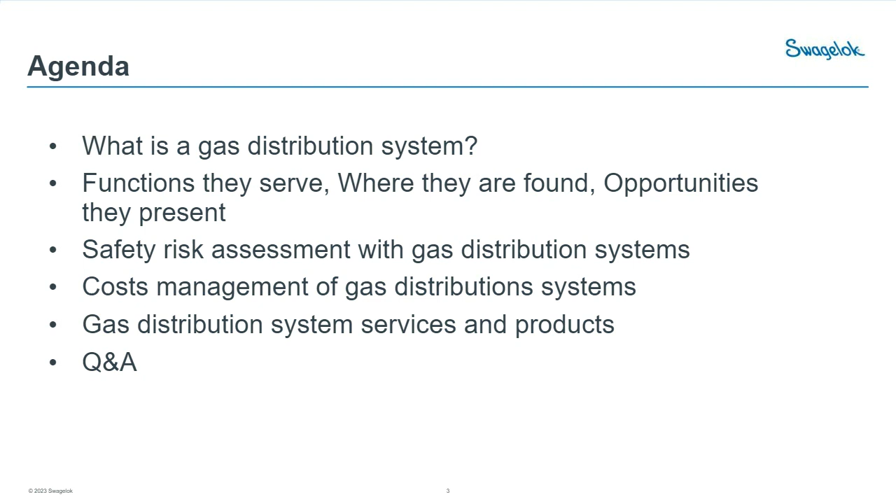Today, we're going to break a little bit into the DNA of these gas distribution systems. We're going to talk a little bit about background, but then really get into a high-level risk assessment, where our goal will be to understand some of the best practice mitigations. From there, we'll dig into the cost management of these systems, really with the intent of looking at the total life cycle. And then, time permitting, we will get into some of the Q&A.

A gas distribution system is defined as a network of tubes, pipes, and a lot of other components that are used to transport a gas, typically from a high variable pressure source to a designated controlled point of use.

In this example, we have a laboratory where the point of use is within, sorry, I have an overhead announcement going on.

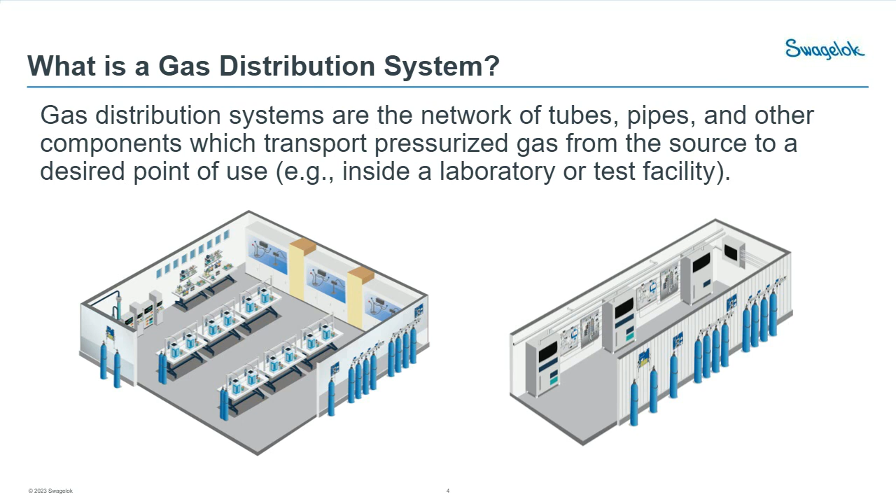The point of use may be our laboratory equipment, and then the source gases come from the outside. So in this case, they're stored within the bottles on the outside of the environment. A gas distribution system can serve a variety of functions, but at minimum, it needs to ensure that personnel can access the gas bottles so that they can be adequately replaced.

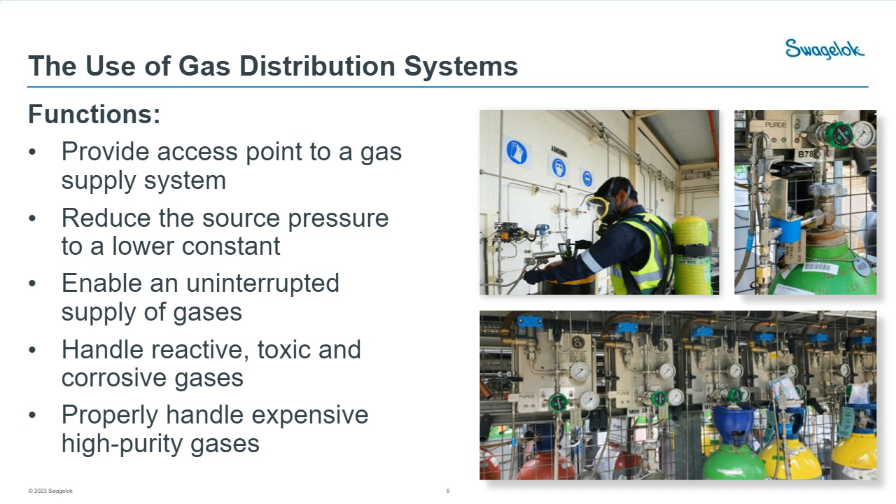At its core, a gas system is really intended to help deliver a high variable pressure to a low constant point of use, as we've mentioned, in a very uninterrupted manner. And the neat thing is that these gas systems are capable of handling reactive, toxic, and corrosive gases, as well as judiciously handling your high value, high purity gases.

Gas distribution systems can be found in a variety of applications and in a variety of industries. But one thing that we see that's kind of unanimous across all of these is that there's always opportunity where these systems are overlooked and misunderstood.

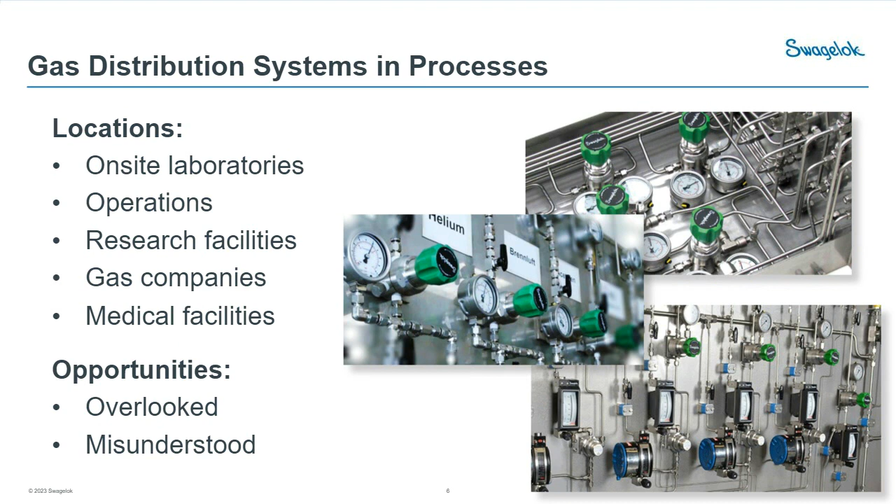What we see among our customers is largely that those who overlook these systems on a regular basis fall into one of four paradigms. Sometimes ownership is not routine, meaning you may have a facilities or an MRO team that handles your pedestrian gases, compressed air or nitrogen, low cost stuff. But then you have specialty gases that are owned by, say, a laboratory manager. And where the ownership is maybe not routine or not typical, sometimes these systems fall through the cracks.

In other cases, we have a utility that may span multiple jurisdictions and ownership is not clear. In other circumstances, we see that these systems are simply deprioritized. In some cases, it's because there's higher priority activities. In other cases, it's treated as more of a foundational utility, like it's just taken for granted. And that fits in with the last paradigm, which is kind of that set it and forget it, where it's often overlooked that gas distribution systems need some TLC and need some regular maintenance and oversight.

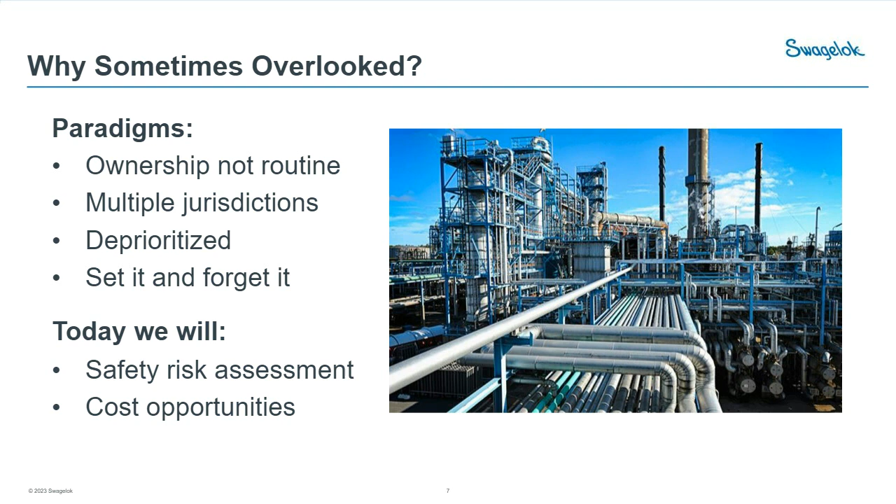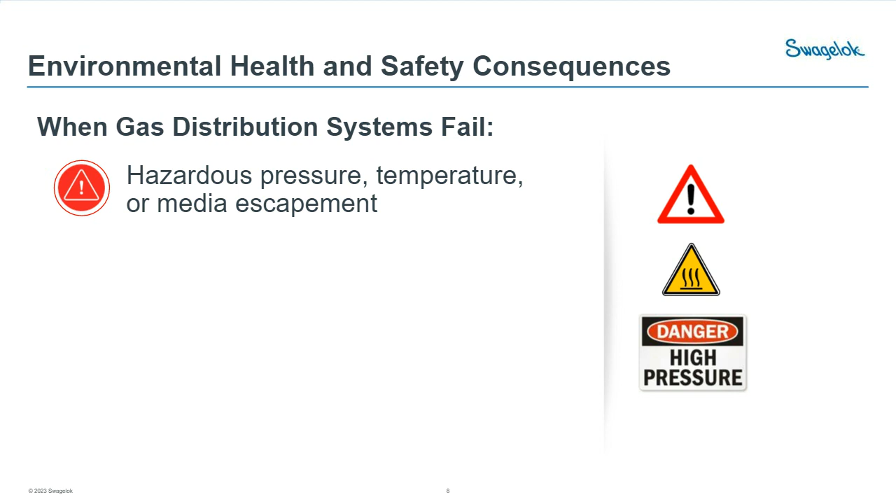So today we're going to dig into both the safety risk assessment as well as an opportunity on cost and cost management for these. As we jump into our risk assessment, it's important to first look at some of the potential adverse consequences to both personnel and environment around gas distribution systems. When they fail, at its core, the risk is that a hazardous pressure, temperature, or media escapes and causes adverse impact for your personnel or environment.

Another potential consequence, or really a cause, is that with pressure reducing devices like regulators, it's possible that they fail, resulting in an overpressurization either upstream or downstream of that regulator, contingent upon regulator type, where the equipment, either upstream or downstream, may or may not be capable of handling that pressure, temperature, or media.

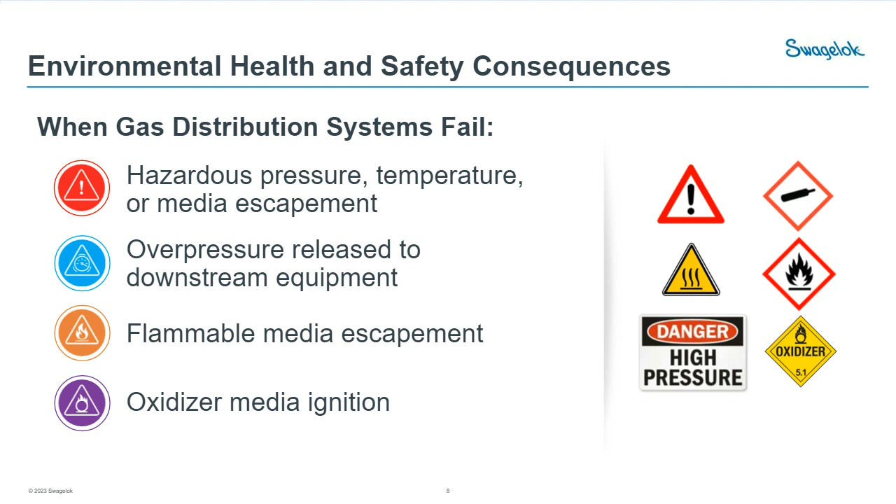It's also possible that we may be carrying a specific type of hazardous media, like a flammable media, where when that escapes, it can cause other risks for people and environment. Or it may be possible that we're carrying an oxidizer, where that media, independent of escapement, could ignite given the right conditions. So all of those things can be bad for people and environment.

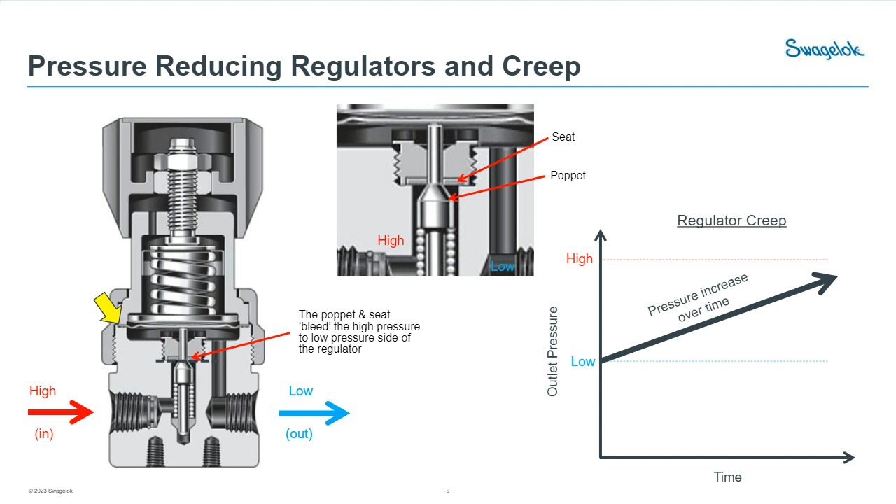So the look of this slide and the next few slides are going to be very similar. We're going to be talking a little bit about risks, and we're going to start with opportunities for design in the way of these gas distribution systems. So with all risks, we start with an oversight. The oversight allows for certain failure modes to occur. As a consequence of those failure modes, there are undesirable consequences. The same consequences that we talked about earlier.

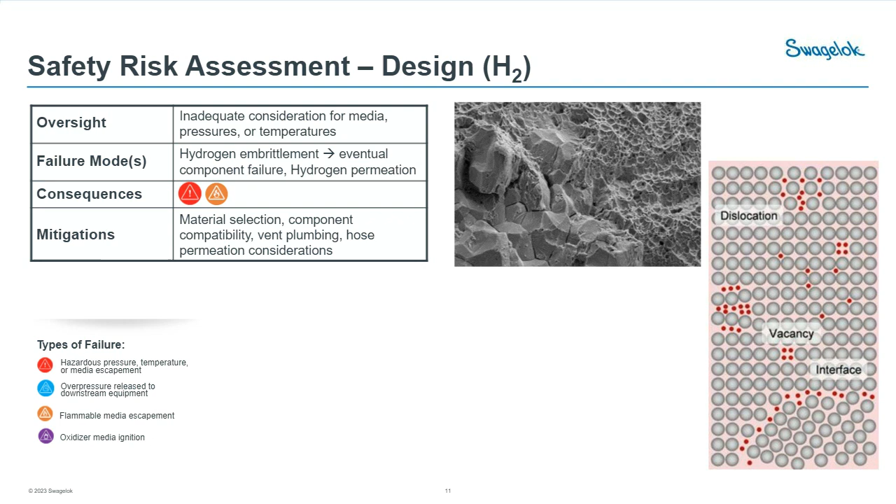Another risk or failure mode behind hydrogen is inadequate consideration for permeation. Permeability is the measure of how easy it is for a small molecule gas to leak through some sort of membrane. And in the case of a gas distribution system, we have to pay special attention to the organic materials that we choose. I think of things like hose cores, O-rings, or valve seats as some of those things that we need to pay special attention to, to ensure that we don't have excess permeation.

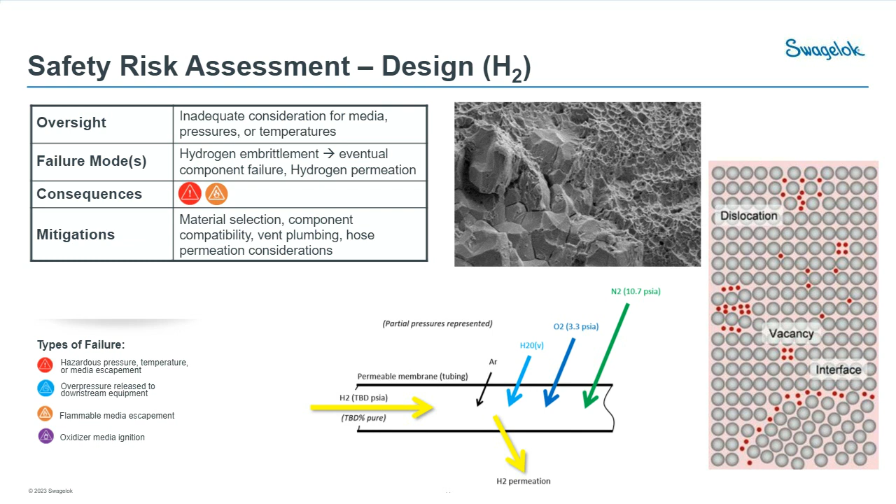Another inadequate consideration for media involves consideration for oxidizer medias when it comes to gas distribution systems. So in this case, we'll talk a little bit about oxygen. Oxygen is a problem because it can ignite given the presence of both a heat and a fuel source. And that can happen at very low concentrations. Admittedly, 16% or greater oxygen concentration percent by volume is enough to cause ignition. The air we breathe is greater than 16% concentration of oxygen.

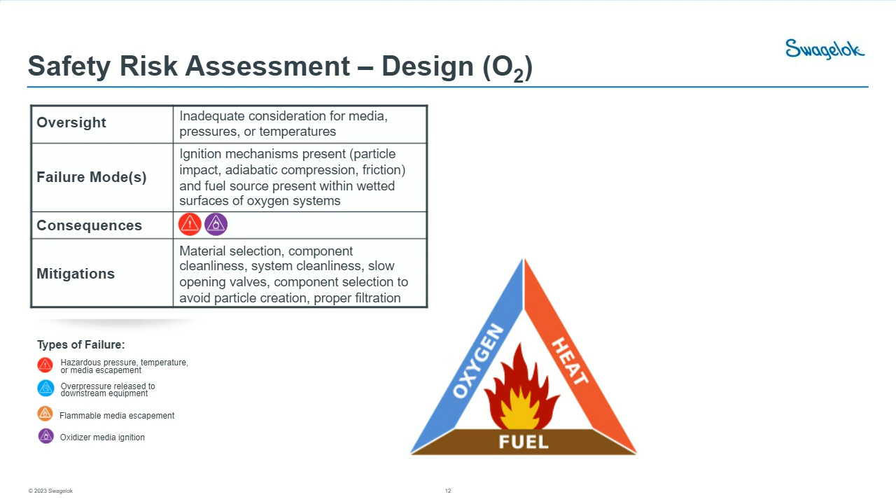There are other oxidizers too that we won't hit on, but are still equally at risk: fluorine, nitrous oxide, ozone, to name a few. The primary failure mode of an oxygen system is that we allow for the presence of that heat and fuel source to complete the triangle. So at its core, the mitigations involve adequate material selection so that we can minimize the fuel source.

Another source of fuel could be the contamination that is present on the gas distribution system when it's constructed. That contamination can be mitigated by using ASTM G93 certified components. ASTM G93 is just an industry standard around oxygen service, and it ensures adequate hydrocarbon and particulate cleanliness as to mitigate that fuel source risk.

Now, heat sources can come in a few manners. It can come from the friction within our gas distribution systems, but it can also come from things like adiabatic compression, which is what happens when we see a rapid increase in pressure. We also see an immediate increase in temperature, and that can be enough to cause ignition.

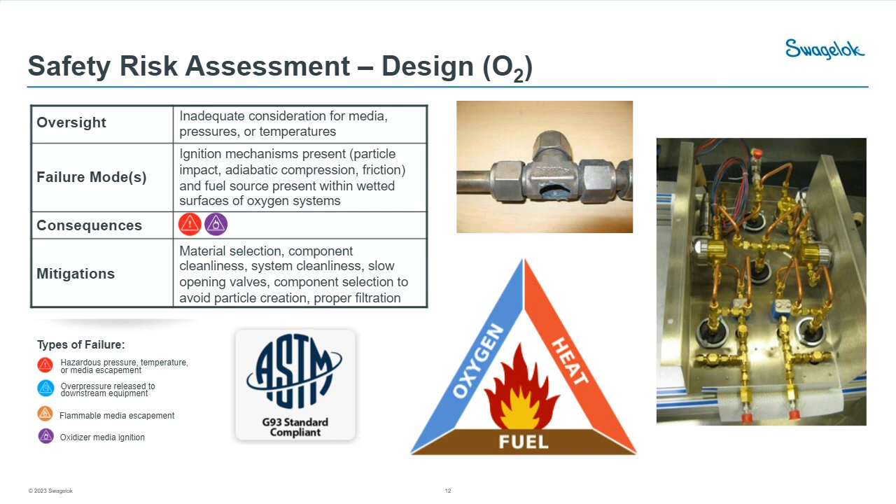So we can deploy nice little tricks like making sure that we don't create particles in our gas system. So that comes down to, again, material and component selection, as well as leveraging proper filtration to catch some of that stuff before it does bad things.

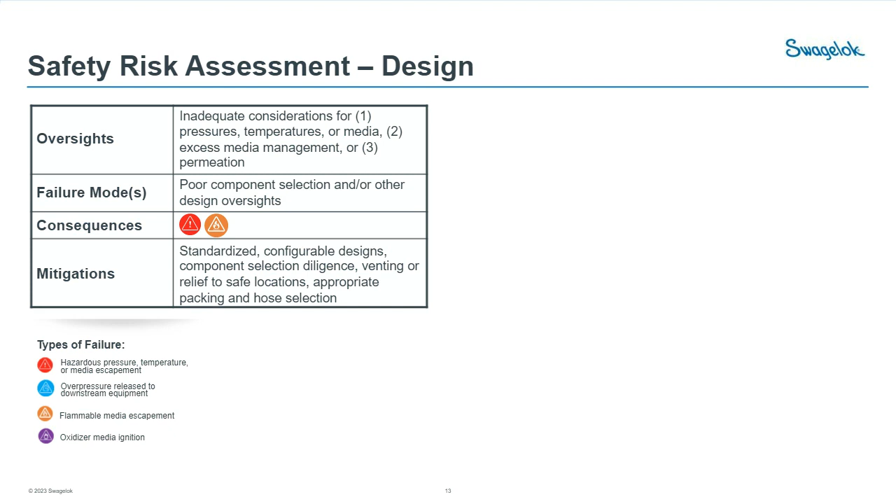There's a couple other generic design oversights that I'll speak to quickly around gas distribution systems. Probably the most prevalent oversight we see is really an inadequate component selection.

Let's face it, there's a lot of parts out there. Anybody who looks at a product catalog, it's usually overwhelming. And it's really easy to lose sight of what's important given the fact that we have materials and flows and pressures and temperatures and media compatibility, all that stuff. So in order to mitigate that risk and the subsequent failures that come along with it, we highly recommend reaching out to the right resources, internal resources, external resources.

There's a lot of great knowledge out there that is at our fingertips. Also leaning on standardized designs, whether it's designs that are proven within your organization and or for your applications, or leaning on pre-engineered, pre-standardized systems. Those are very effective for handling and helping to mitigate risks around some of the unique medias and pressures and temperatures that we see.

Another oversight that's very common is inadequate consideration for where our vent or our relief valves vent to. And this is important. That goes back to the earlier schematic. If we have a hazardous media, a flammable media, or an oxidizer, chances are likely we don't want to see it dispelled into the general environment where our people could be potentially at risk. So whether we're venting to a safe roof line or to a containment area or even to flare, that's really paramount, and that's something that we see more often than not.

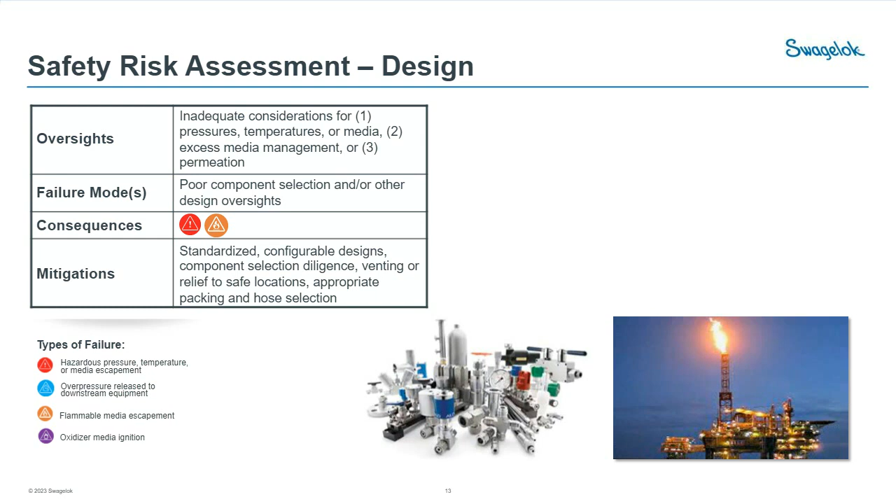Lastly, permeation, not just for hydrogen in our earlier example, but permeation of a hazardous media can be risky. So adequate consideration for some of the organic materials that are at risk for permeation is paramount.

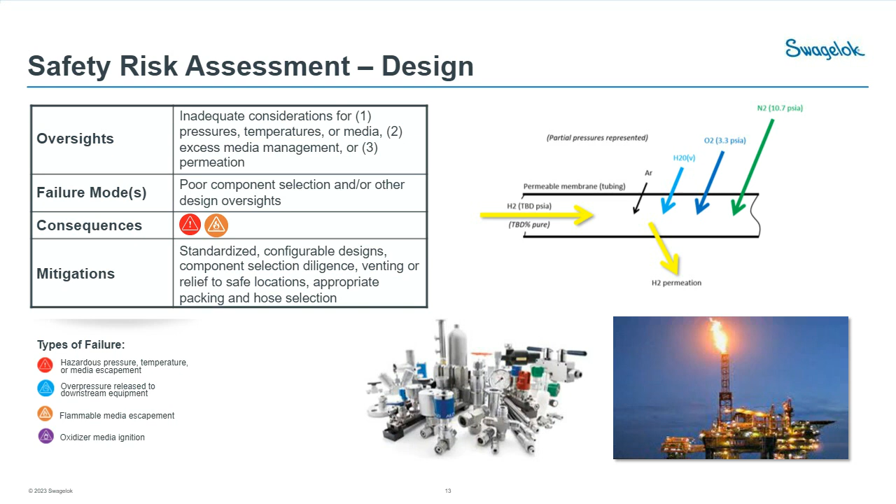Beyond design, there are risks that we inherit or can be exposed to during the assembly, test, and installation of our gas distribution systems. At its core, these failures happen when we don't adequately pull down the components, assembly of the components is inadequate, and we fail to appropriately and safely test prior to full pressurization. And this can have a sequence of undesired consequences.

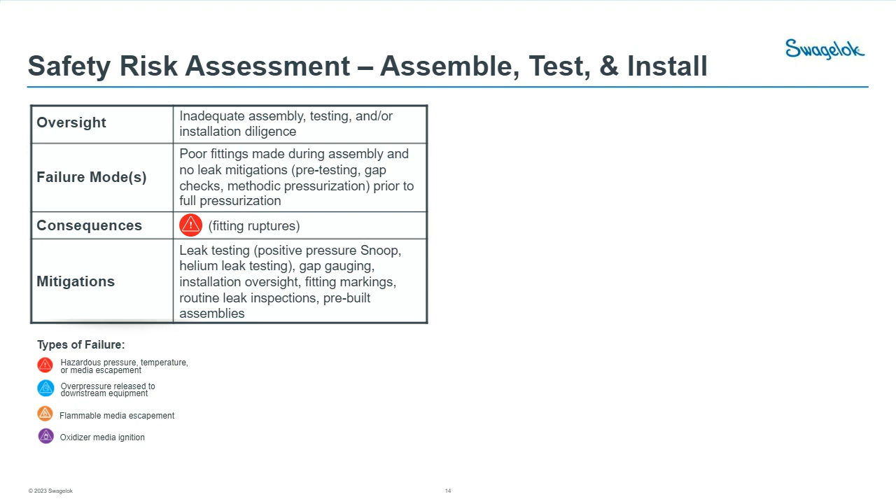I've seen fittings not properly pulled down with full pressurization. I've seen tubes bend over backwards and fire ferrules and nuts into locations where they're never found again. And lucky for me, I've never seen someone actually get hurt, but it's very possible. So we have certain tools, mitigations that we can deploy to help catch and prevent these things from happening. We can rely on basic leak inspection.

So whether it's a soap and water combination, or if we've got a nice little pre-assembled unit that we can stick onto a helium leak tester if we have concerns for some of that smaller media that's of high value. We can do mechanical fitment checks to make sure that we've adequately pulled down the fittings through gap gauging.

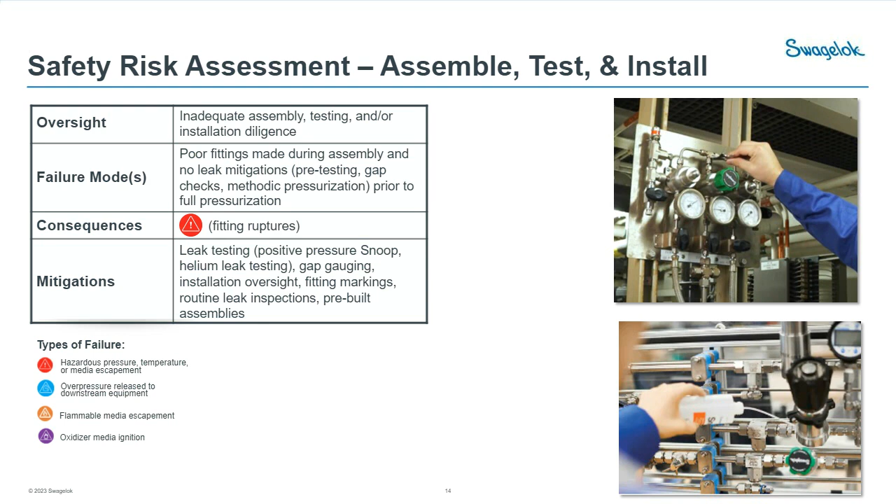I've seen a lot of organizations deploy checklists, or this is one of my favorites. I've seen pipe fitters and plumbers initial some of the fittings that they've done in Sharpie so that they know that they've pulled it down and that they've done the gap gauging. It's kind of a nice check and easy to audit.

Also, leaning on pre-assembled panels or pre-assembled systems is very useful. Let's face it, a system that's built in a contained environment that's free from distractions, like the distractions of otherwise building it in situ on the shop floor where it's noisy, greasy, loud, you're much less likely to observe those human errors that might otherwise result in some of these risks that we speak to.

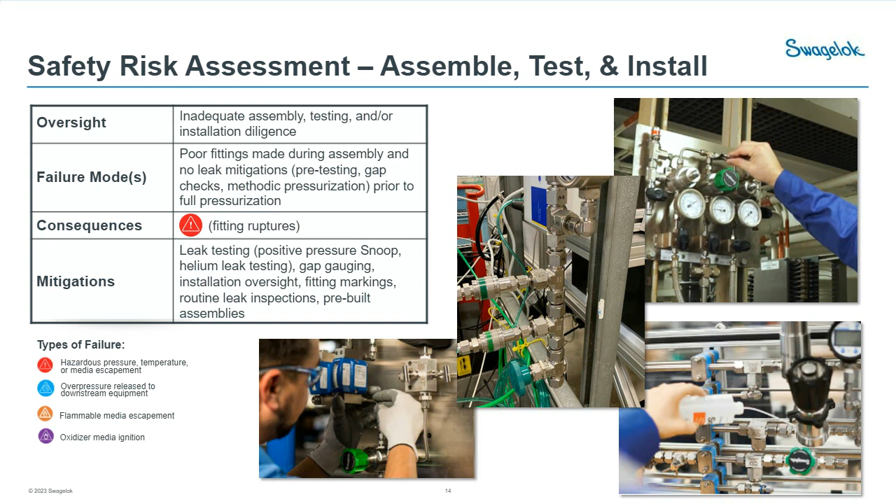The last opportunity certainly lies in the way of leveraging installation oversight. So whether you have a buddy system where you have someone pulling down a fitting, or you have a tradesman pulling down a fitting and then someone goes through and audits it, or there are organizations that will offer you that same sort of oversight should you so choose to deploy it.

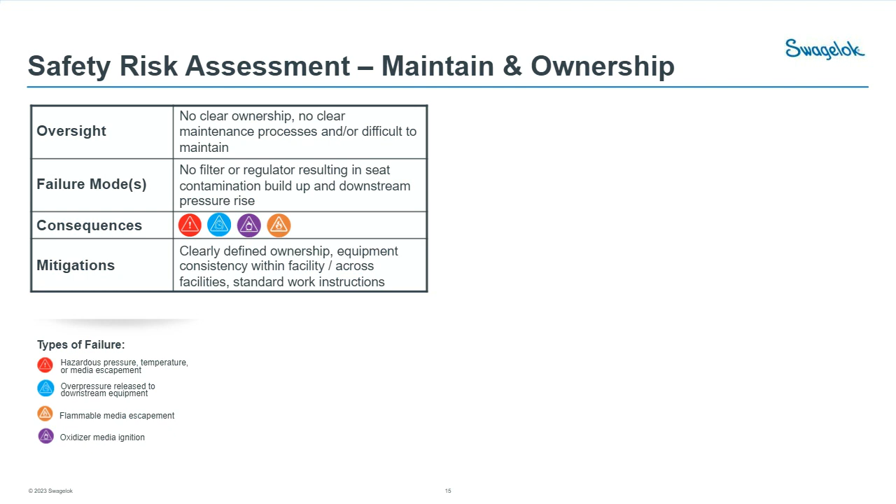One of the most common organizational shortcomings that we see with gas distribution systems, as we've kind of talked about, is the lack of ownership and sustained oversight of these systems. One of my favorite sayings about gas distribution systems is that these are often the types of systems that, like loose change, fall between the couch cushions. And when it comes to the change that's at risk here, it's not just from a safety standpoint, but it is about cost, which we'll get to here in a moment.

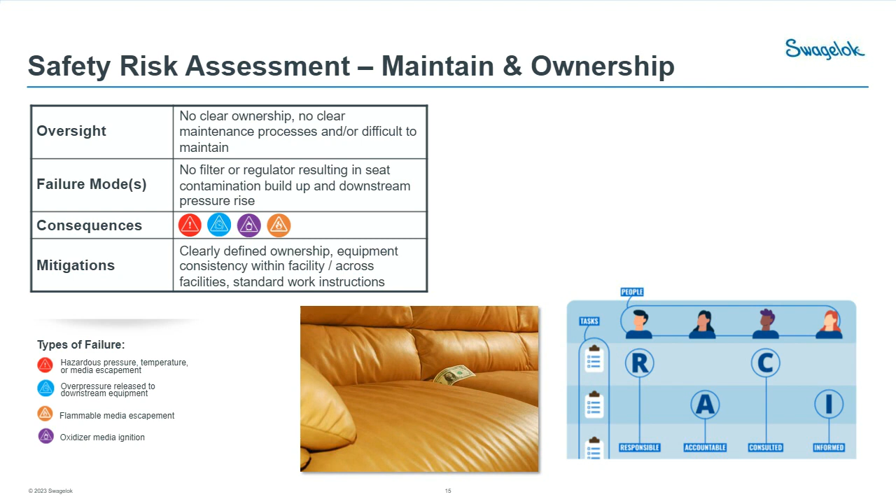So in order to mitigate those risks and some of the undesired consequences, which, let's face it, there's quite a few, we definitely recommend that organizations have clearly defined ownership for these gas systems. Typically, this is cross-functional ownership, where the accountable parties, the people that everyone answers to, are conventionally resources like a plant manager or an MRO manager or a facilities manager, a lab manager, someone with some sort of oversight that can watch the breadth of the responsible parties.

From a best practices perspective, having standardized work instructions for maintaining this equipment is paramount. Some gold standard organizations leverage their MRO systems for automated maintenance minders, ensuring preventative maintenance follows the desired cadence. And what unanimously works is relying on regular audits for these gas distribution systems to ensure good safety and stewardship of resources.

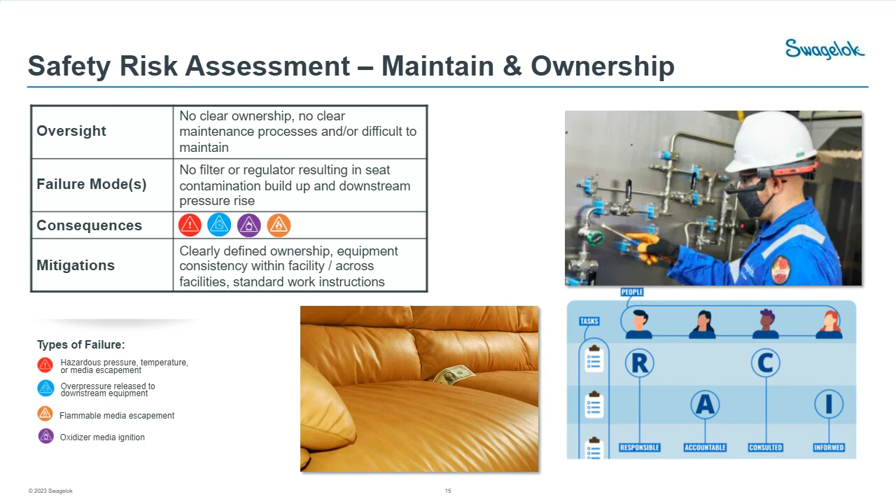Speaking of fiduciary use of resources, we now jump to controlling costs. If you talk to anyone in your finance team, you'd find that opportunities for controlling costs typically fall into three categories: cost savings, cost avoidances, and revenue preservation.

Cost savings are things that honestly go right back into the profit for an organization. They're costs that have historically always been in our rearview mirror, and if we can stop paying them today and tomorrow, then it goes right back into our profits.

It's no different with cost avoidances, however, which are things we maybe don't typically see, but should we have a failure of a gas distribution system, there's definitely going to be a need for some cash or capital outlay to help remediate that failure.

Last but not least, revenue preservation is equally important and often bucketed into this cost controlling opportunity. Let's face it, if we're not pulling in revenue, we're probably not making a profit.

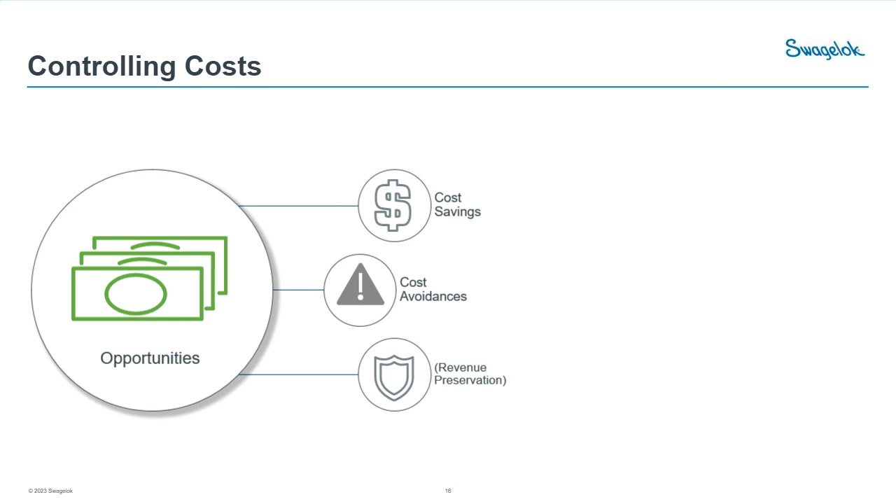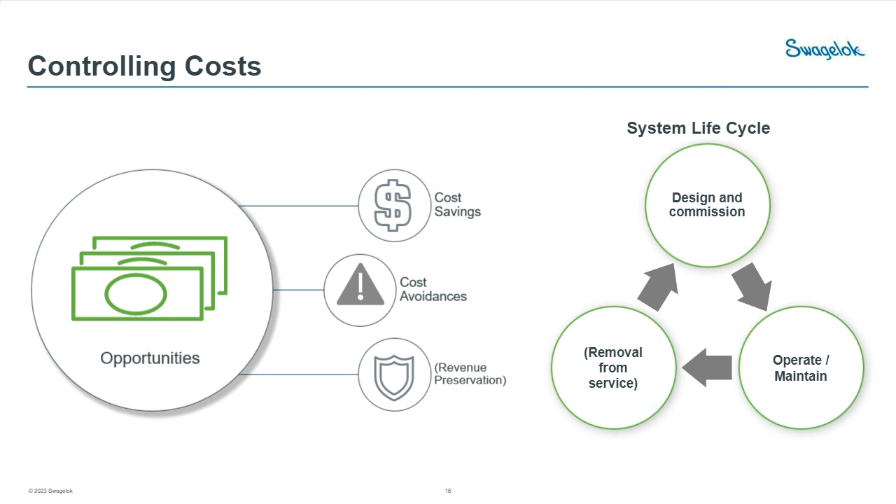Now, what we'll do over the next couple slides is talk a little bit about the system life cycle of these gas distribution systems and opportunities for controlling costs in both the design and commission, as well as the operate and maintain stages of the life cycle.

Since we started off with safety risk assessments, it only seems appropriate that we first start our conversations on safety. So what I'm going to do is share some statistics from the United States. My apologies to anybody joining us internationally. By sharing these stats, I'm not at all trying to take away from the emotional or physical toll that associates who deal with a workplace injury have to pay. But I do want to point out that there is a dollar value, a cost to organizations in the way of an avoidance by seeking to avoid these injuries.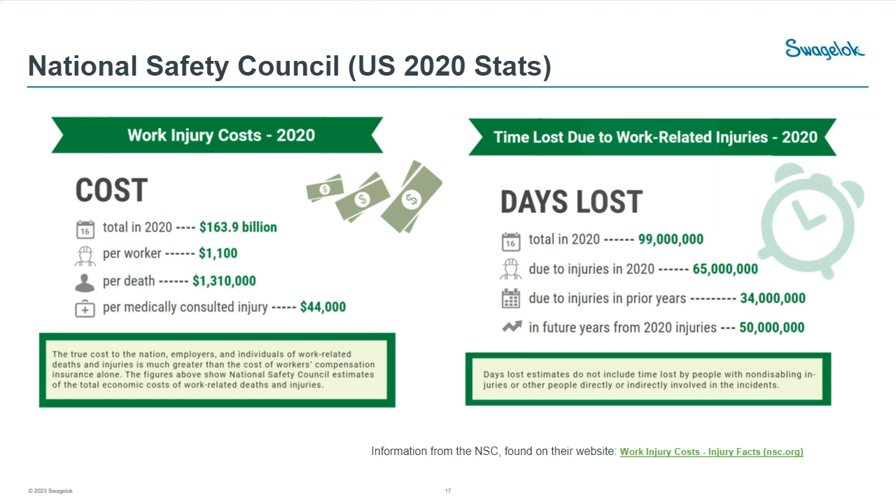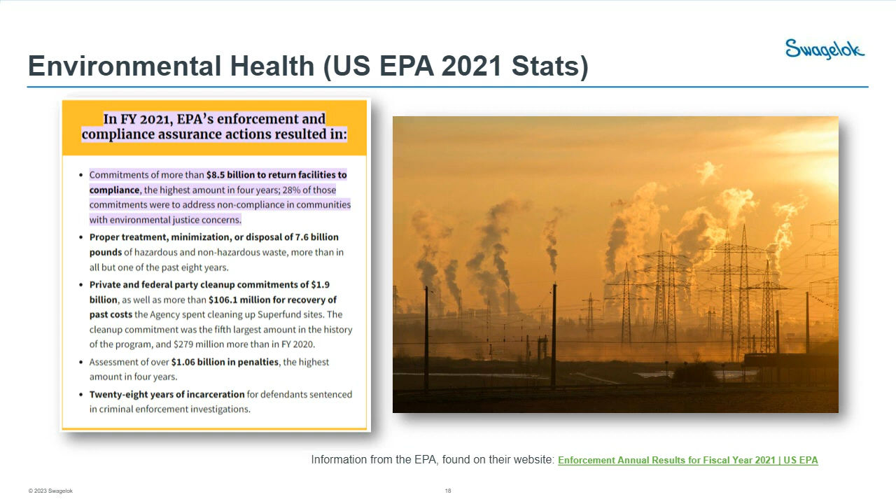A big opportunity in the way of cost avoidance when it comes to gas distribution systems involves the use of pre-designed, pre-engineered panels when building or replacing your system. These offer a lot more than just the convenience of avoiding and freeing up some of the labor and engineering resources to do it.

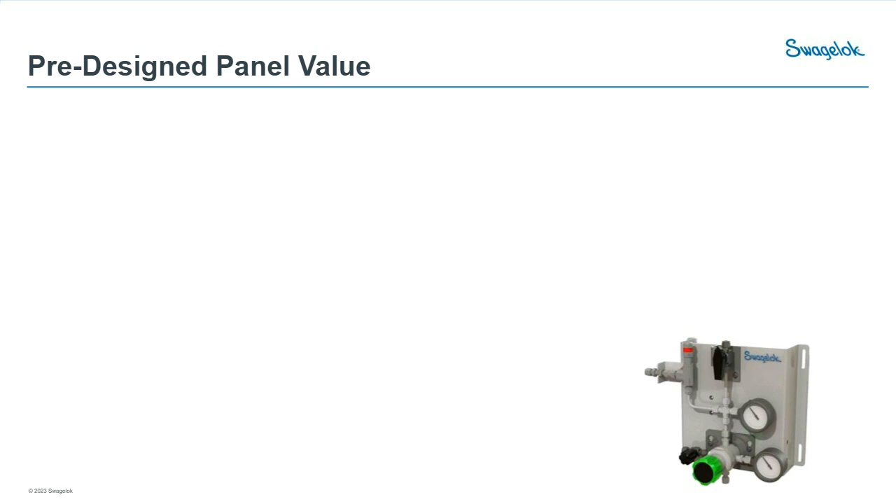Let's say, for example, we have a relatively pedestrian pressure reducing panel, like shown on the lower right here. This panel flows from bottom to top. It includes a regulator at the bottom, a couple gauges that straddle that regulator, a vent valve to the lower left, a relief valve to the upper left, and then an isolation valve at the exit, all built on a stainless panel.

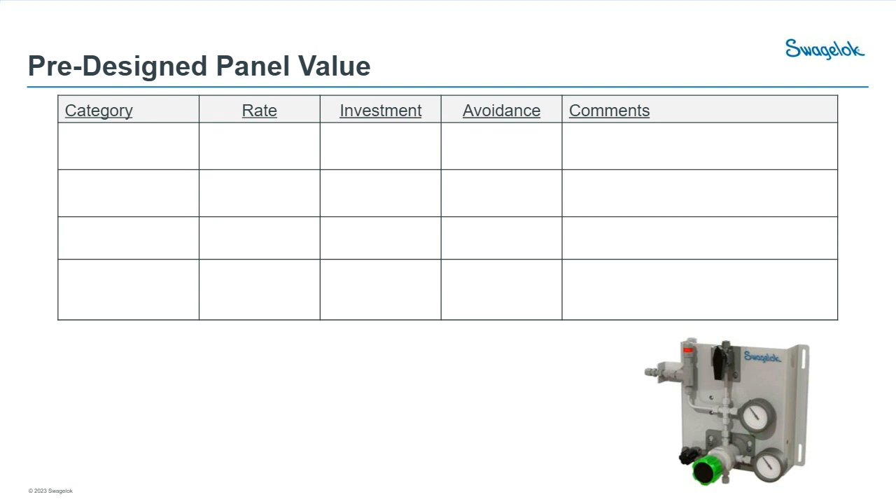Let's say hypothetically that we know the pressures, the temperatures, the medias, the flows, and all the necessary safety mitigations that we want to build into that, and we're ready to pick parts. Well, it turns out there's actually quite a bit of engineering value built into that pre-designed, pre-engineered panel.

There's also a lot of convenience in the way of labor avoidance when it comes to managing the inventory, should you alternatively seek to build it yourself. There's less packages to deal with, less content verification, storing, staging, and the like.

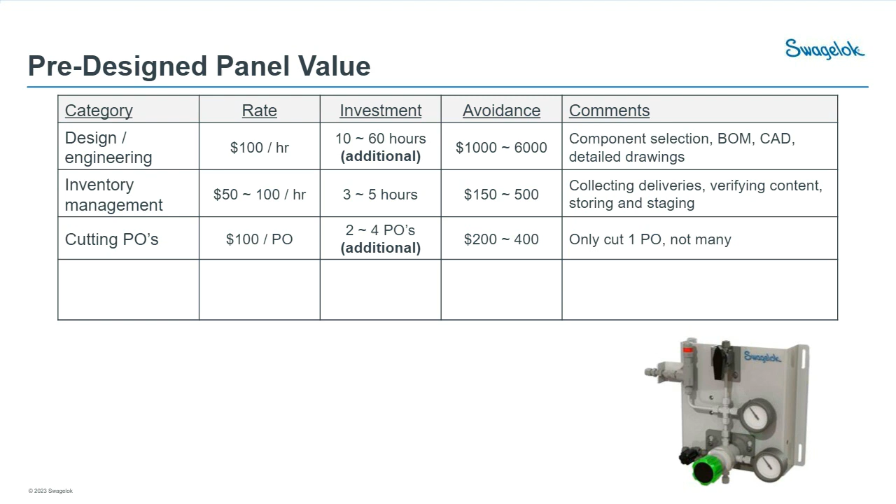There's also a convenience in the way of reduced PO cutting. Let's face it, a PO for most organizations is not cheap, especially if you've got an organization with multiple approvers. Those approvers are generally not cheap either, from an hourly rate. So cutting one PO versus cutting 3 to 5 is a huge advantage here.

Last but not least, whether you build the panel yourself or lean on an organization that typically builds these panels, their labor rates, your labor rates, tend to be much more cost effective than leaning on an outside tradesman, a pipe fitter, a plumber, whose hourly rates generally tend to be sometimes 1.5 to 3 times more expensive. There's quite a bit of cost avoidance there as well.

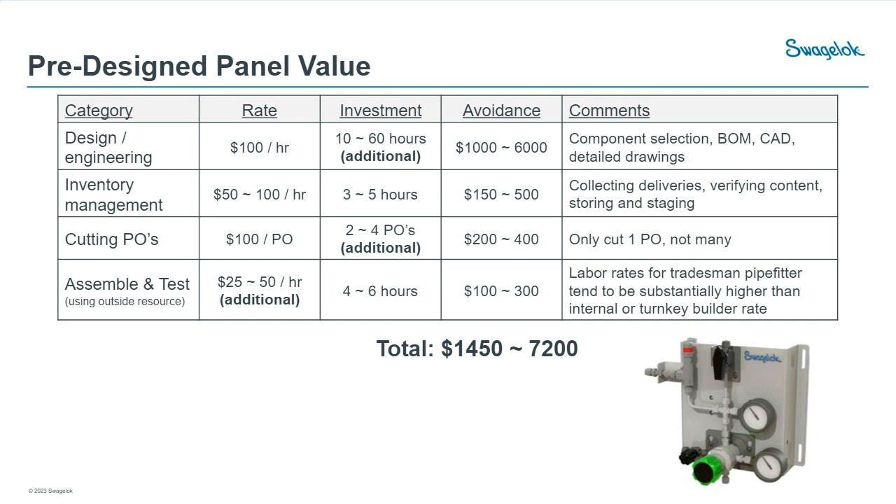In the aggregate, there's quite a bit of value built into these pre-engineered, pre-designed panels, and that can be a huge opportunity for organizations that look and seek to simplify and seek those cost avoidances. What's really amazing is that in this lower example, the overall price tag of that panel is dwarfed by the overall value built in. So it's a very useful lever when you know what to look for.

Jumping over to some cost saved opportunities, I'd like to speak to one in the maintenance arena. The specific opportunity is the idea of promoting your components to the front of a panel. So if there's a pre-assembled panel like shown on the left, bringing the components to the front offers some value in the way of maintenance labor over the alternative of burying those components behind in the back.

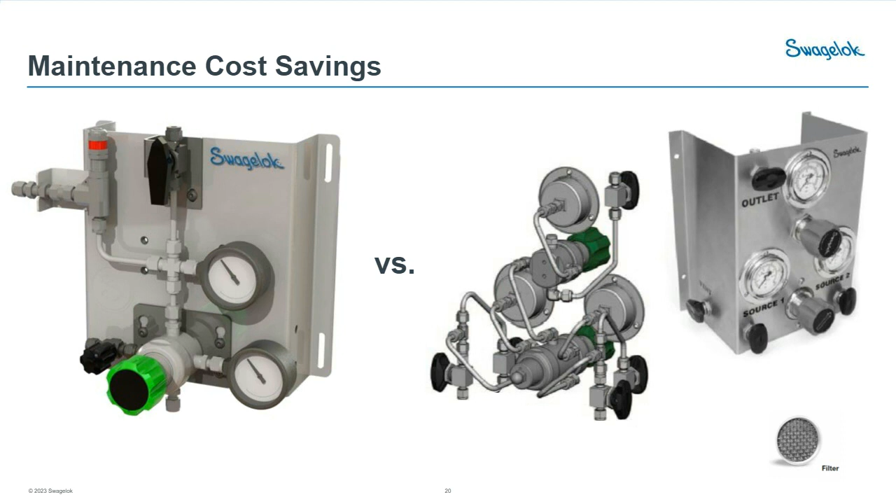Let's hypothetically say that we need to service the filter, shown on the lower right. That filter typically is installed at the inlet of our pressure reducing regulator - we have one regulator on the left, two on the right. Regardless, the access to that filter or that regulator is much more convenient when picking the option on the left compared to the right, to the tune of an estimated half an hour to two hours of savings in time by choosing the option on the left over the option on the right.

So let's say, for example, your maintenance rates are like between $50 to $100 an hour, and you've got multiple of these panels. Well, this can amount to thousands of dollars in savings per maintenance interval. And on top of all that, what's really great about the design on the left is that because the components are easy and visual to see, it's more intuitive how the panel should operate, assuming there's not clear instructions about how to use the equipment compared to the option on the right.

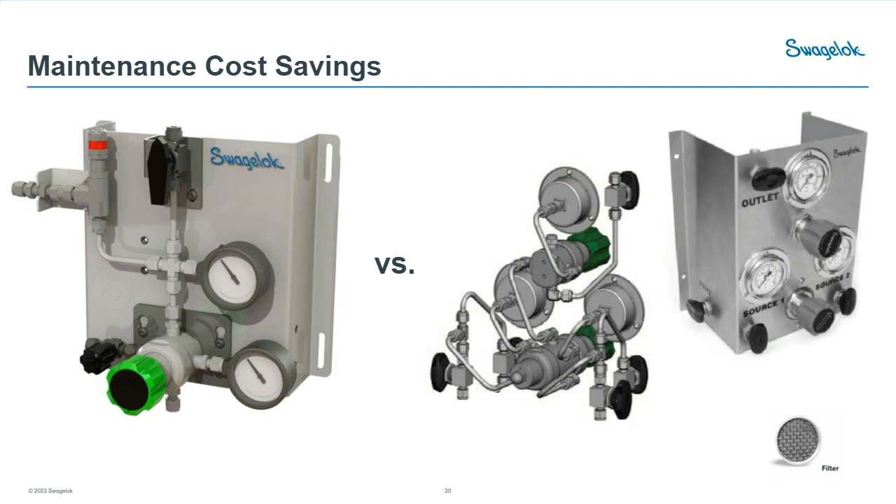Probably one of my favorite cost savings opportunities in the way of gas distribution systems is the leveraging of changeover panels for critical operations. The premise of any gas distribution system, but especially a changeover panel, is to get as much out of the bottle as we can while preserving a critical operation.

So the premise of a changeover panel is to have both a primary and a secondary source of a gas, such that as the primary is depleted, a secondary backup source can be deferred to upon depletion. In the case of the option on the left, as we deplete the primary, manual intervention is required by an operator or an associate to integrate those changes. And then once the secondary source is depleted, we can defer back to the replaced primary source.

Comparatively, the option on the right shows an automatic version of this changeover. As the name implies, it will automatically shift from primary to secondary, and then from secondary back to primary as the bottle sources are depleted.

What's really convenient about this is that systems of this nature can be configured with alarms and pressure switches. Pairing that with an andon light or a stack light, we can have some sort of automated alerts to let folks know that they need to make these changes.

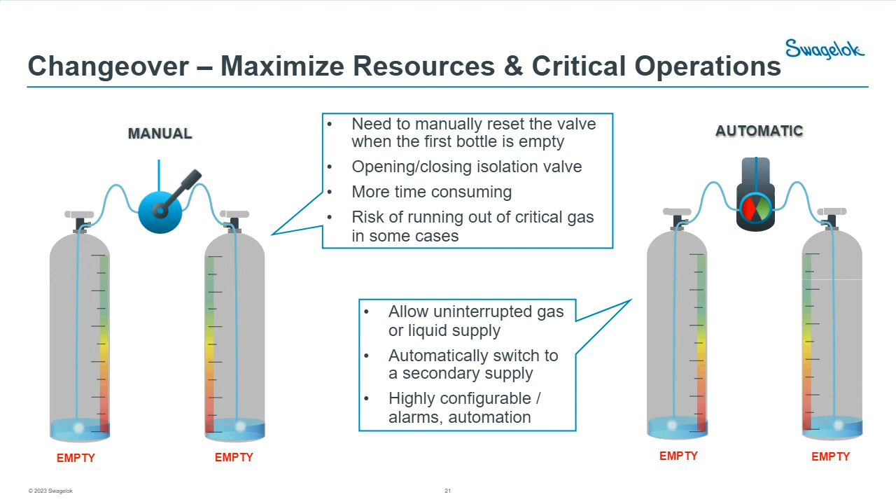Let's look at an example of where changeover panels can offer substantial value. In this case, we have a customer who uses a relatively pedestrian helium for their operations - meaning like maybe 99.8% purity, nothing exotic, not 5, 6, 9s.

In this case, the customer receives their helium in the way of a tube trailer, and they get a tube trailer about once a month. And helium is pretty expensive for those who use it. For those following the helium market, helium has tripled in cost over the last 5 years, due to both high demand - the helium market has a CAGR of over 6% - paired with the fact that we have a very volatile supply.

So helium's gone up. Customers paying $175,000 a month for their tube trailer replacement. The trailer would come in pressurized at about 3,000 PSI. The customer, once the pressure hit around 700 PSI, would call their gas supplier and say, please bring me a new truckload.

700 PSI was by design. It ensured that the customer had about 5 to 6 days of critical operation. Per the service agreement that the customer has with their gas supplier, they were given up to 5 days to respond. So as a result, 700 PSI was the outgoing pressure.

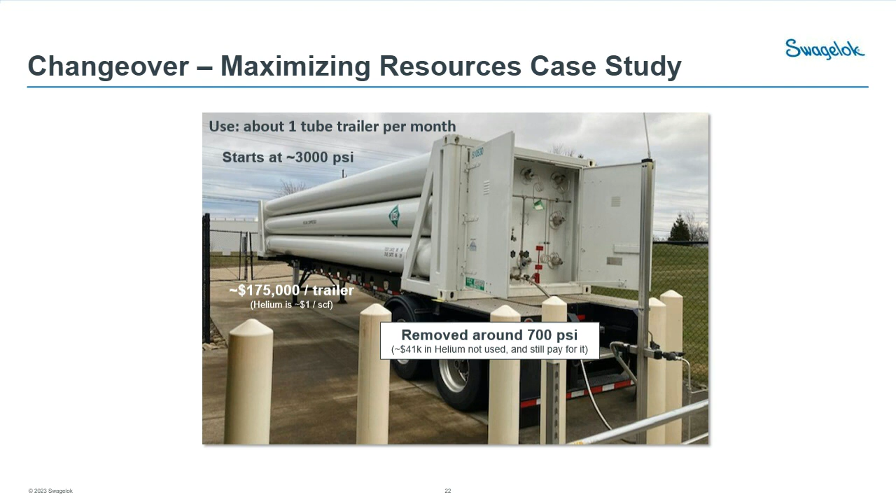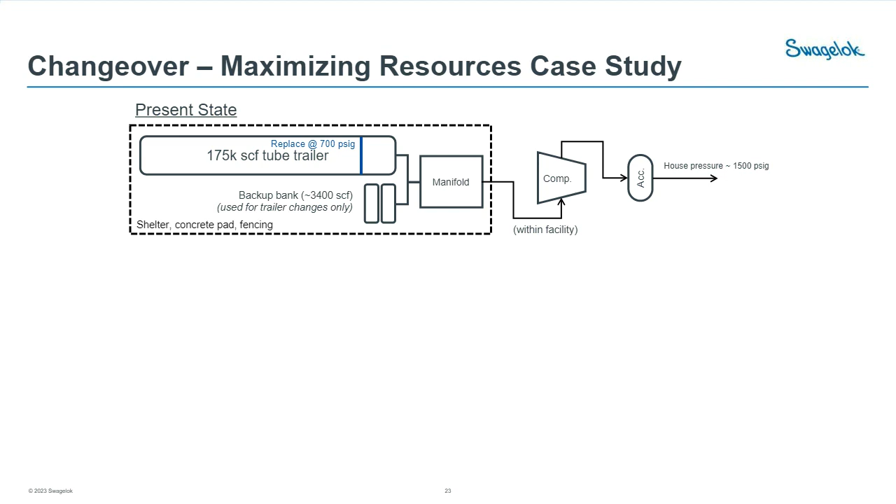Shown schematically, we have the tube trailer. It would feed into a very basic manifold, where the manifold would toggle over to a very small backup bank while the tube trailer was conventionally being replaced. From there, the manifold would feed a compressor within the customer's facility and an accumulator combo in order to supply the house pressure for the customer at around 1,500 PSI.

Swagelok was able to look and see a tremendous opportunity for a basic changeover panel paired with a second tube trailer. By doing that, we're able to demonstrate to the customer that through a primary-secondary kind of AB combo, they could get a lot more resources out of their trailer, depleting it to a much lower level, leaving fewer molecules of that very valuable resource in the trailer.

And that amounted to a substantial cost savings for the customer on an annual basis. It was like a very attractive payback. And what was equally important for the customer was that it helped them preserve that critical operation using a very valuable resource. Furthermore, Swagelok was able to really help them with a redesign of their compressor accumulator combination within their facility to help reduce some of the nuisance alarms they were experiencing. So an awesome example of where changeover offers a tremendous amount of value.

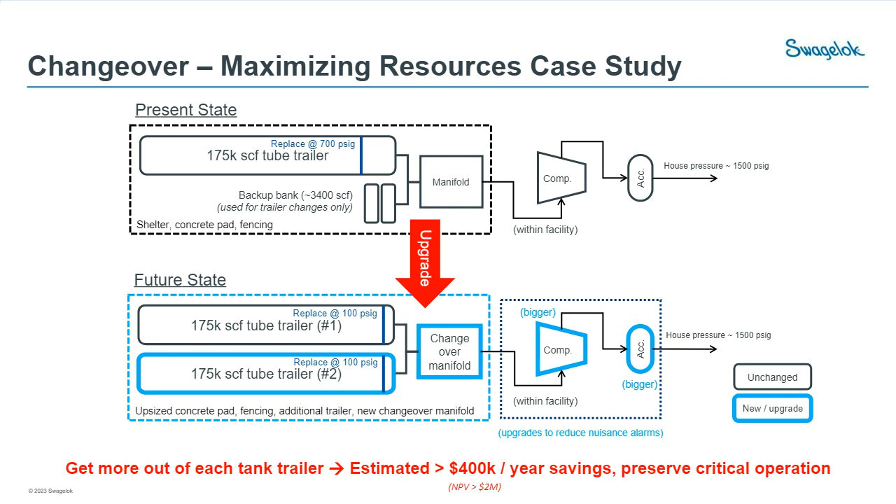Recovery costs are another category of hidden costs within gas distribution systems, and these are definitely considered a cost avoidance. When a gas distribution system fails, we've got to do something to fix it, and that always comes with a price tag - either in the way of a capital or an expense investment, and this can take on a variety of forms.

Let's say, for example, that we've got some sensitive equipment that relies on a very precise pressure supply - so we've got a gas chromatograph, or a gas chromatograph with MS. Typically, those devices require a precise inlet pressure, like 15 PSI max range between min and max pressure.

So if we have a failure, like an overpressurization in that gas distribution system, it's very possible that we run the risk of damaging the electronic pressure control module within our gas chromatograph. And we all know that this can be really expensive - gas chromatographs and low cost usually don't go together in the same sentence.

So it's very possible that that repair, along with our gas distribution correction, can take some time and cost us money. It's also possible that while we're out with that gas chromatograph, we may have to defer to an outside lab, which can come with additional expense, additional cost.

Another category of recovery costs include recovery labor. Let's face it, gas distribution systems are also often considered a critical operation, and they can go down at any time. And that includes weekends and evenings when our staffing is typically less likely to be at full force. And for those folks that have to triage these systems at inopportune times, that can cause some frustration.

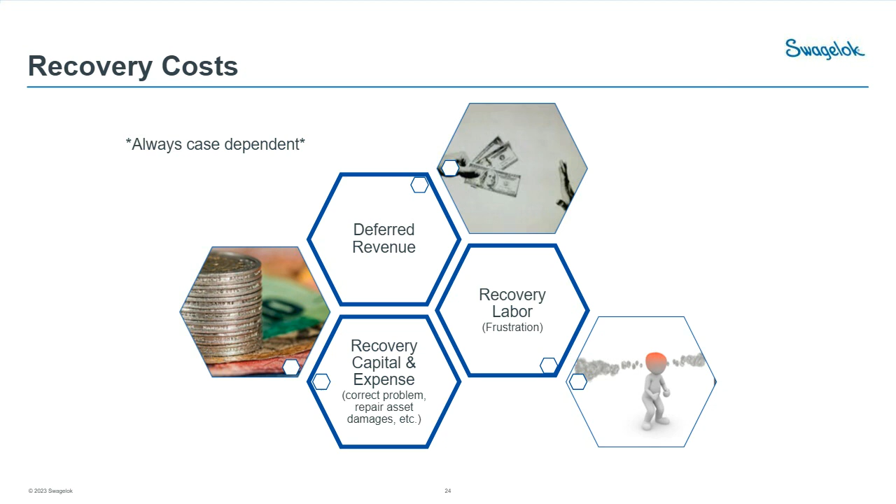My last thoughts in the way of costs come in the way of reputational impact and the final financial implications that this can have for organizations. So for most organizations, their reputation is simultaneously both their most valuable asset as it is the thing that is always at greatest risk. For the consequences that we've already discussed, these can all detract from outward reputation.

So to combat this, some of the best organizations, some of the best customers that we see, they do a couple of things really well to help manage this. But the number one thing that they do is they ensure that their gas distribution systems, along with all other critical assets, are involved with an annual risk assessment, where that risk assessment is comprehensive and it's enterprise-wide. And a wide array of cross-functional contributors are involved and contribute to that risk assessment.

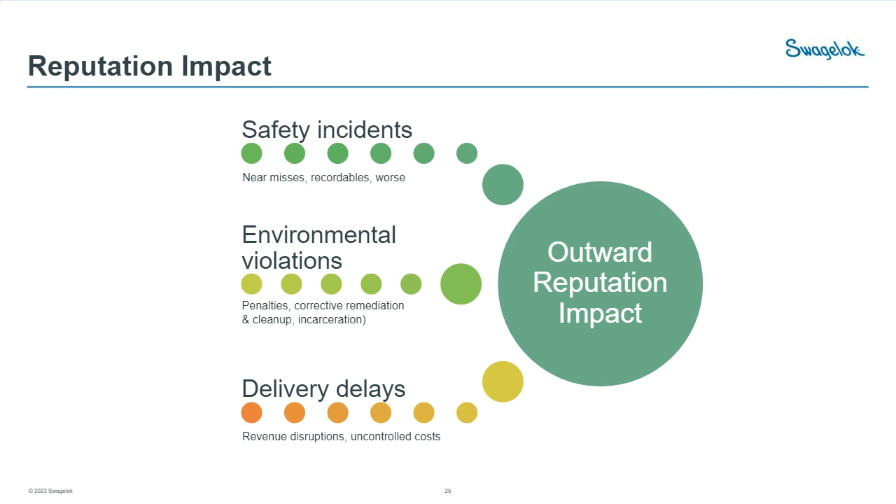The risks that they weigh include a variety of categories and are often weighted. They factor in things like human safety, environment, costs, revenue loss, as well as reputation. And full transparency, reputation tends to be the one potential impacted item that carries the most weight.

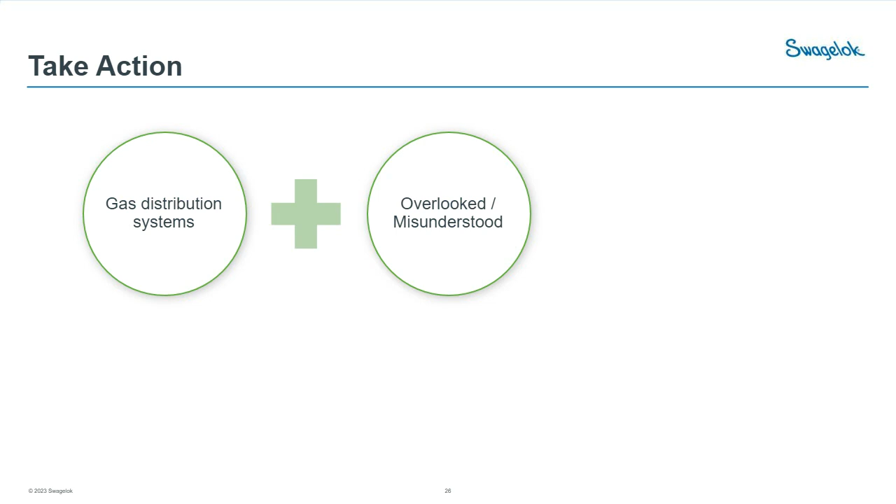So I've reached the end of what I'd like to talk about. And just to repeat, the main theme that we see in industry across applications as well as broader industry is that these gas distribution systems are often overlooked, misunderstood. And this can result in risks for the customers, risks for your enterprise, as well as unneeded costs. And most importantly, the risk to reputation that this bears for the customers, for the owners.

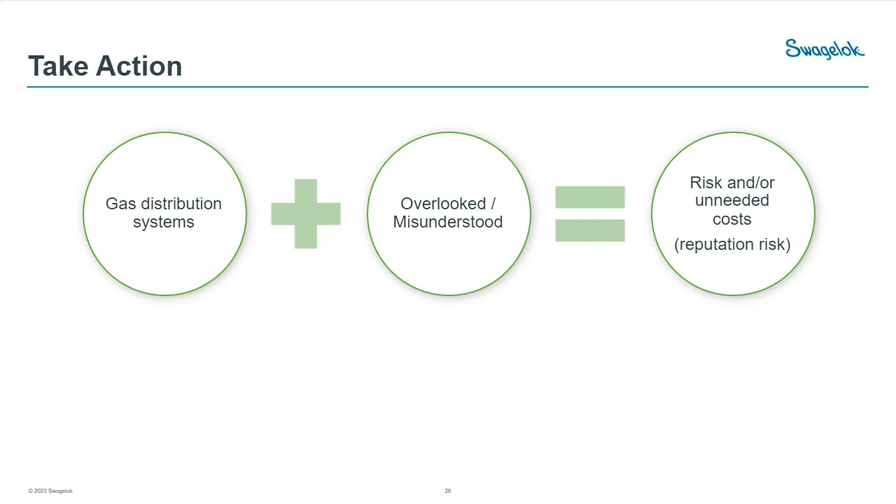So I encourage you all to, within your organizations, look inwardly at your gas distribution systems and seek out, do you carry similar risks, and where are your opportunities for both safety improvements as well as costs?

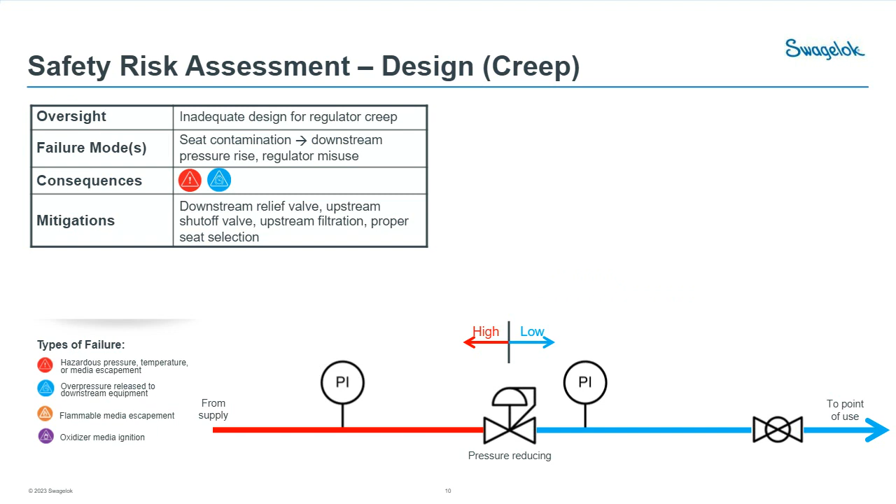Okay, that's great. Here's another question from our audience. What are best practices for servicing my oxygen system to avoid safety risks? Sorry, there are some typos in there. No worries. Yeah, I'd say, like we talked, the name of the game with oxygen is cleanliness. And the objective is to avoid both oil contaminants as well as any solid particulate like metal contaminants.

So starting with clean components is the first step, right? Like if we have any replacements, we need to make sure that we're dealing with SC11 cleaning, or ASTM G93 cleaning is paramount. And or starting with cleaned bagged tubing is also very useful. Being careful to not contaminate the work pieces with either our hands, allowing for the environment to cause contamination, or even our tools.